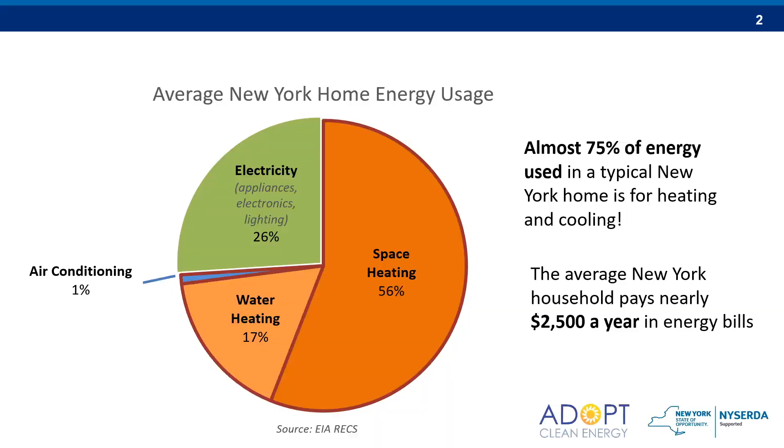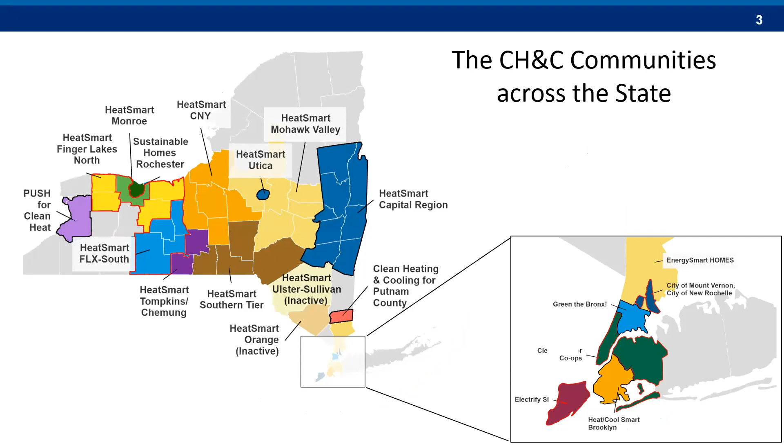So why adopt clean energy and why pursue heat pumps? Well, energy costs and energy burdens are a significant concern to New Yorkers, and heat pumps can in many cases provide energy savings, particularly when combined with other energy efficiency measures and switching to renewable forms of electricity. Improving home comfort is another concern that I think many have noticed, particularly over the last 18 months of being more or less trapped in our homes. Improving the distribution of heating in homes and also adding air conditioning has been a concern that many across the Northeast have faced.

Reducing the combustion of fossil fuels in homes can lead to healthier homes, with air pollutants related to combusting fossil fuels associated with increased risk of asthma and respiratory illnesses. Of course, the primary driver behind this, and why New York is investing so heavily in clean heating, cooling, electrification, and community initiatives, is to reduce greenhouse gas emissions in support of achieving the state's goals.

The goals of adopting clean energy are both to improve the efficiency of your home, reducing the amount of energy needed for heating and cooling, and to replace existing heating and cooling solutions with cheaper, cleaner, and more efficient solutions. Heat pumps are perhaps not the most well-known technology folks associate with reducing emissions, so this process can be a little complicated. That's exactly why Adopt Clean Energy is here, to make the process more straightforward and provide support to homeowners and businesses across the region as they embark on this journey.

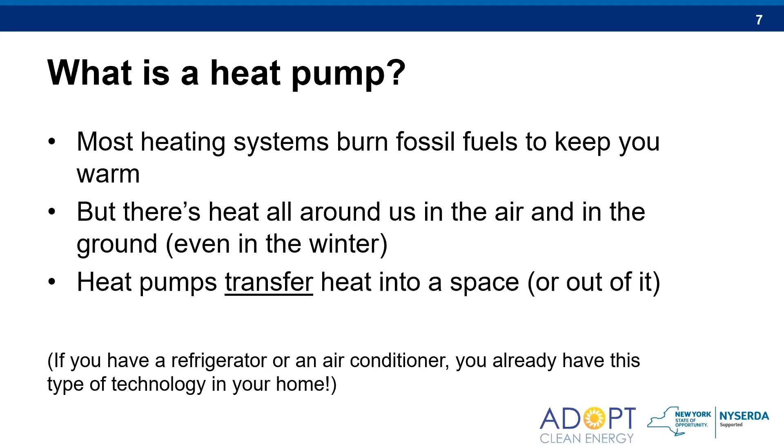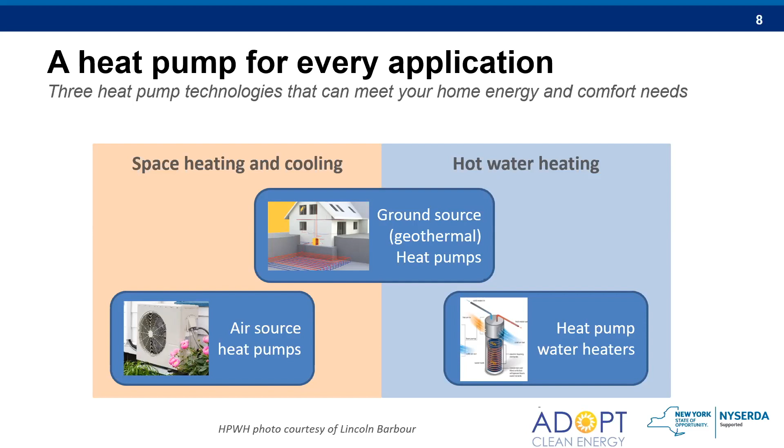There are heat pumps that can meet all of your space heating, cooling, and hot water needs, whether air source heat pumps, ground source or geothermal heat pumps, or heat pump water heaters for water heating. Air source heat pumps are best thought of as air conditioners that can also run in reverse to provide heating as well as cooling. They have an outdoor unit connected to one or more indoor units or to central ductwork in a home. Heat pumps have traditionally had a bit of a negative reputation in the Northeast because of poorer performance in cold climates, but new cold climate heat pumps have entered the market over the past decade that can provide heat down to -13 Fahrenheit or below. In many cases, they're installed alongside your existing heating system, but there are thousands of homes across the Northeast using heat pumps as their only source of heat, even in the cold winters here in New York.

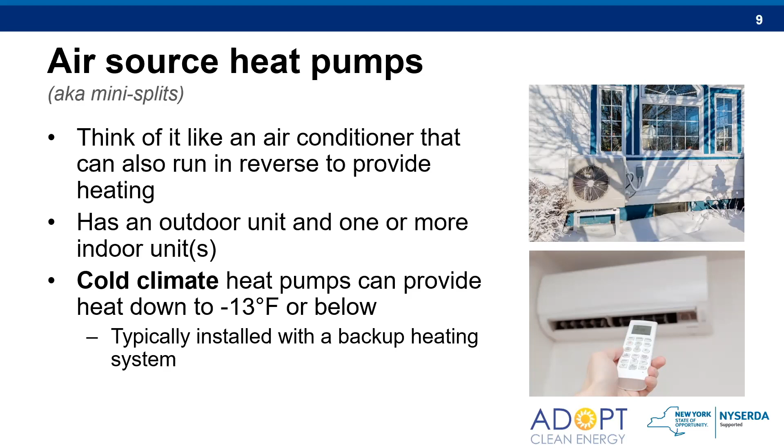Some benefits of air source heat pumps: a lot of homes across the Northeast are old and can't easily install ductwork, so many folks use ductless air source heat pumps to provide air conditioning as well as heating without installing ductwork - a great way to improve comfort and remove noisy window units. There are a lot of flexible applications for air source heat pumps. You don't necessarily need to replace your existing system - you can install ductless systems in a variety of ways, for example to just provide space heating and cooling to a living space, bedrooms, or new additions, depending on your needs. Ductless systems are inherently zoned systems, so you gain more control over comfort in different spaces in your home. They're also very quiet - the first time I heard a ductless heat pump operating, I could barely hear it until I put my head up next to the indoor unit.

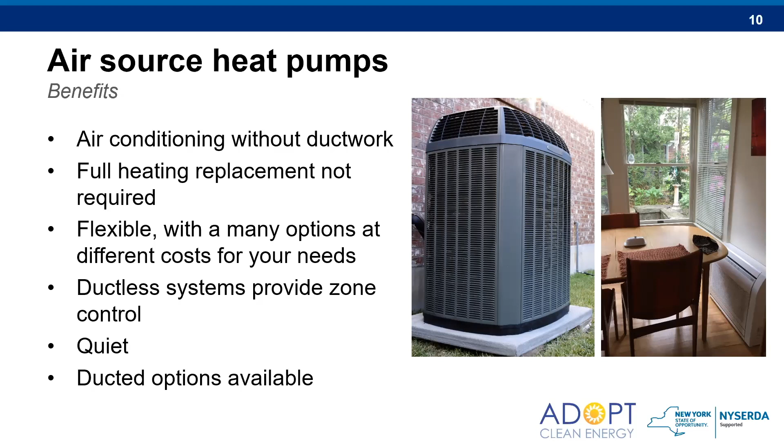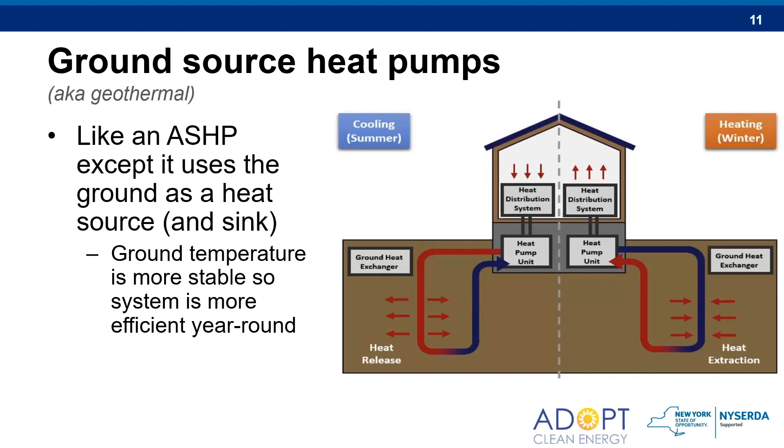Vertical applications will involve drilling a few hundred feet underground, whereas horizontal applications will use some excavation of a yard to be able to lay the piping to transfer heat. If you also happen to have a source of groundwater on your property, they can also be installed as open loop systems using the groundwater to extract or reject heat.

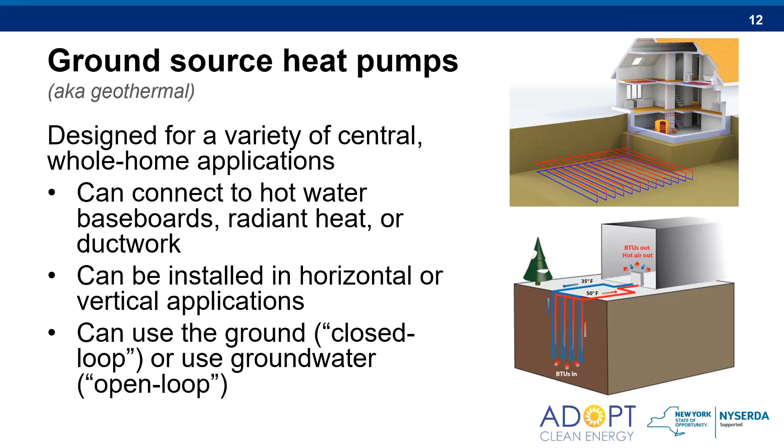Ground source heat pumps are the most efficient heating and cooling system available. While air source heat pumps are usually around 250% efficient—that is, for every 1 unit of electricity used, you get 2.5 or more units of heat—ground source heat pumps can exceed 350% efficiency, whereas the most efficient fossil fuel or electric resistance heating system will never exceed 100%. Again, because of the more stable temperature, ground source heat pumps have less of a drop off in efficiency.

Ground source heat pumps also have a very long system lifetime. The ground piping that's installed in your yard is expected to last for at least 50, if not 100 years, whereas the indoor components for 25 years or more.

Ground source heat pumps, as a standalone and sole source of heating or cooling, can fully eliminate fossil fuels from your homes and can also provide domestic hot water if desired.

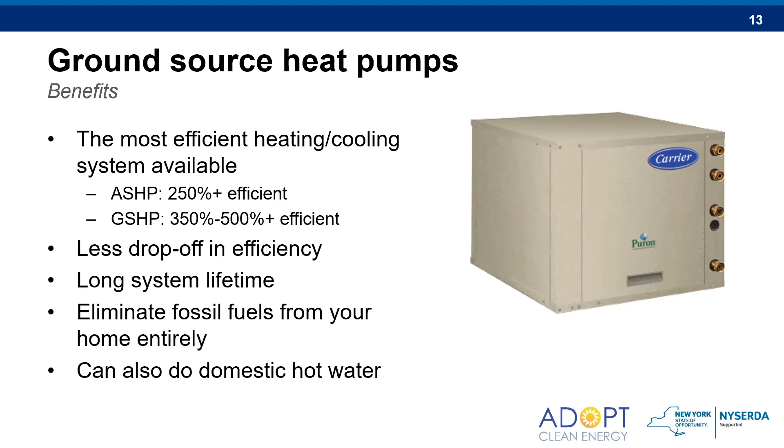The last form of heat pumps we'll talk about are heat pump water heaters, which really just look like a hot water tank with heat pump elements on top of it, and it uses the indoor air around the heat pump water heater to heat your hot water. There are also backup electric elements in there for meeting periods of higher hot water demand, so that your hot water can be delivered consistently to meet your needs.

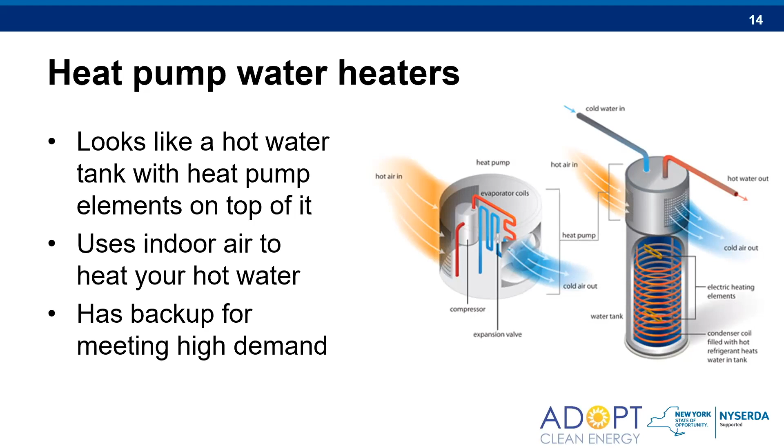Similar to the other heat pump technologies, they are 200% or more efficient than typical electric water heaters, and significantly more efficient than fossil fuel water heaters. They're also very commonly installed in unfinished basements in the Northeast, and so when they are operating, they will also naturally dehumidify the space. So they can be a pretty affordable heat pump solution for saving money.

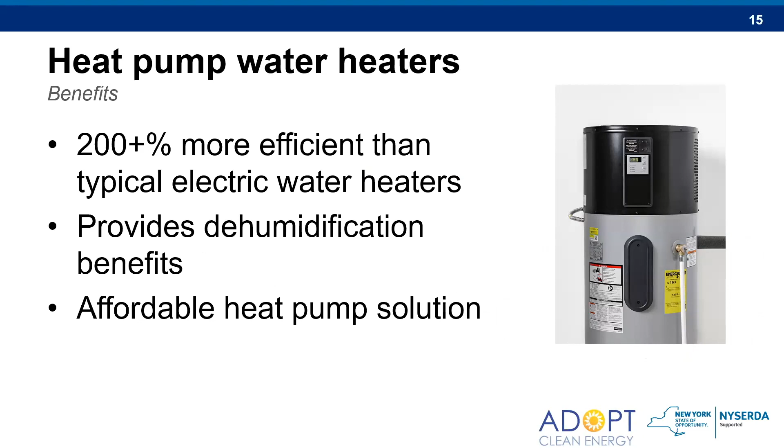The cost of these technologies vary significantly from home to home. No two projects are the same, even if you install the exact same equipment. There may be some different needs between homes or preferences for the homeowner.

But here are some of the potential costs that you can see for the technologies here: air source heat pumps, depending on the solution you're looking for, starting at around $4,000; ground source heat pumps at around $35,000; and heat pump water heaters at around $3,000.

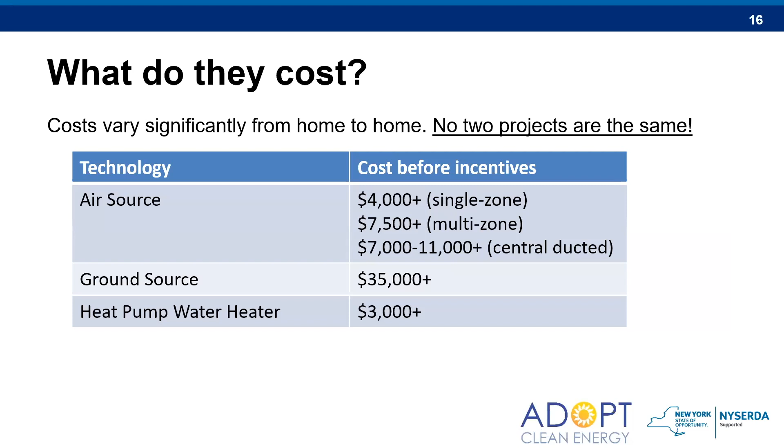How much exactly will you save? Well, it depends very much on what will be the costs of fuels over the course of the 20+ year lifetime that you have these systems in place. Folks that are using oil or propane and electric heating now will see the most heating fuel savings. Folks on gas will not really see as many savings, unless you are using solar PV as your form of providing electricity to your system.

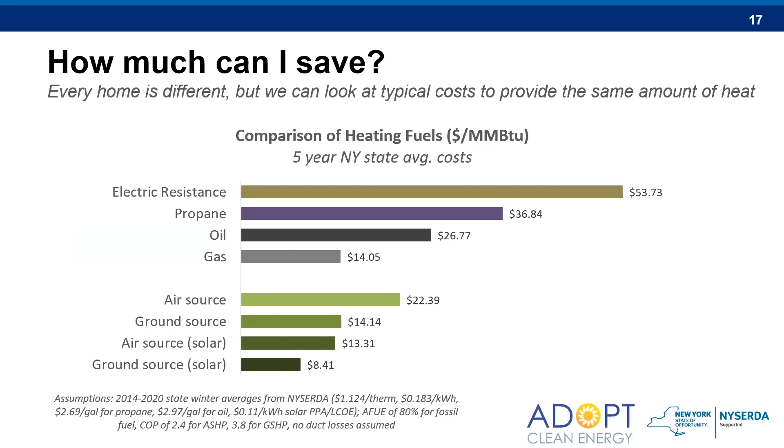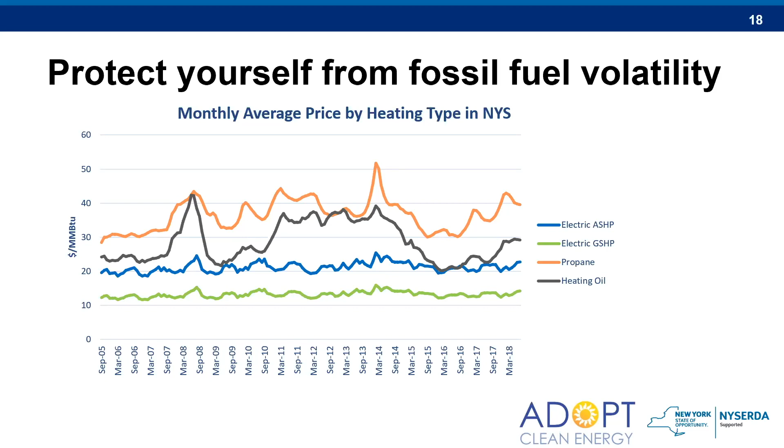But of course, there are also some benefits to switching to electricity. Electricity prices tend to be much more stable as a regulated fuel, whereas, as I'm sure anyone who's heated with oil knows, prices spike from season to season. Similarly, gas futures are at a substantial high right now for the coming heating season. So some of that pricing volatility can be addressed by switching to heat pumps, particularly if you use a solar PV system to generate the electricity for your heat pump.

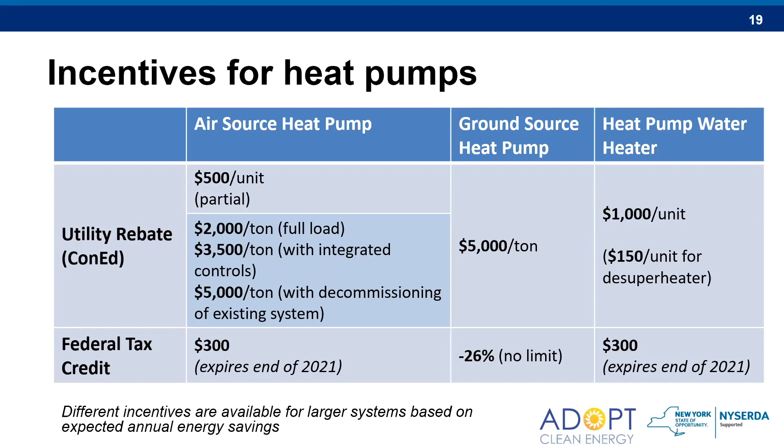Of course, there are also a lot of incentives available, particularly in this area for customers of Con Edison—thousands and thousands of dollars per system. For some of these system applications, you could be looking at over half of the cost being covered by incentives from Con Ed and from the federal government. So definitely, if you're interested in a heat pump solution, speak more with your installer and visit the Adopt Clean Energy website to learn more about these substantial—over I believe a $700 million investment—that is being made in heat pumps over the next few years.

There are also a variety of financing options that are available, both through NYSERDA programs and also through the contractors that are serving Adopt Clean Energy, and a variety of special groups and local banks and credit unions.

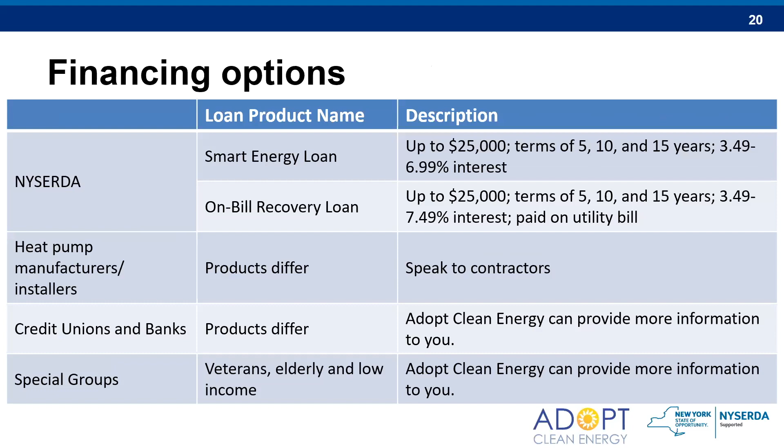So the best place to get started here is to visit the Adopt Clean Energy website. And with that, I will turn it over to the next speaker.

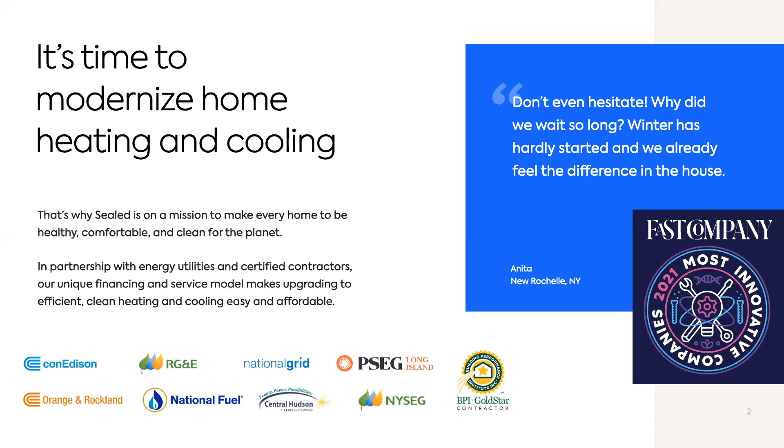A little bit about Sealed: as I mentioned, we're literally invested in clean heat, and that's not only figuratively true, that's literally true. We're on a mission to make every home healthy, comfortable, and clean for the planet. We know that starts with heat pumps, it starts with weatherization, it starts with smart home technology. We work with many local New York utilities, but also very importantly, local certified contractors, with our financing and service model to make upgrading homes easy and affordable. We do that by focusing not on energy, and not even on the environment all the time, but really on the problems that we all feel every day. What we found is the best way to increase the adoption of clean energy and clean solutions is to really focus on comfort, health, safety—all the issues we feel in our homes every day. So drafty rooms, icy floors, uneven temperatures, hot and cold spots, out-of-date heating and cooling systems that may be too loud or cause other problems, and of course, poor air quality. There's more and more data showing that fossil fuel systems in our home, what we like to call dead dinosaur systems, aren't always the healthiest for our indoor air quality. So we really want to help our customers be healthier in their home, more comfortable and safe.

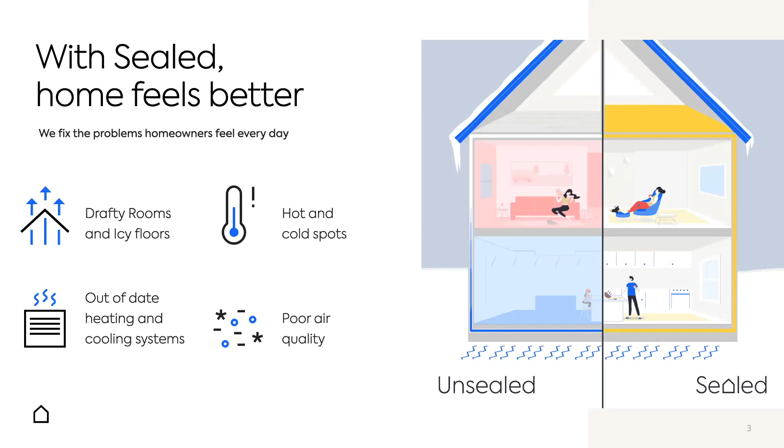You can see a little GIF that we have here to show that. So what we do is we modernize homes through deep retrofits, through insulation, weatherization, heat pumps, HVAC solutions, and smart home tech.

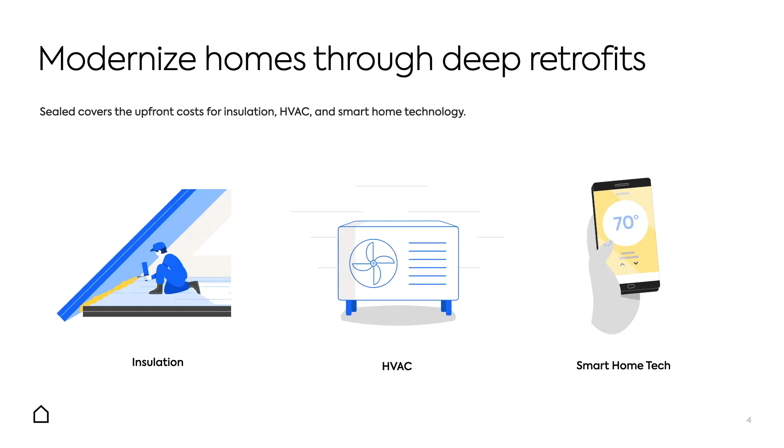We not only put up the capital to install these projects, but we also only get paid back based on the actual energy reduction. So we're putting our money where our mouth is when it comes to the performance of these projects. And then we help manage the process from beginning to end.

One thing we found really important is explaining what heat pumps are and what they do in accessible, easy language, which is key to expanding mass adoption of heat pumps. So if you'll indulge me, let's play a quick video.

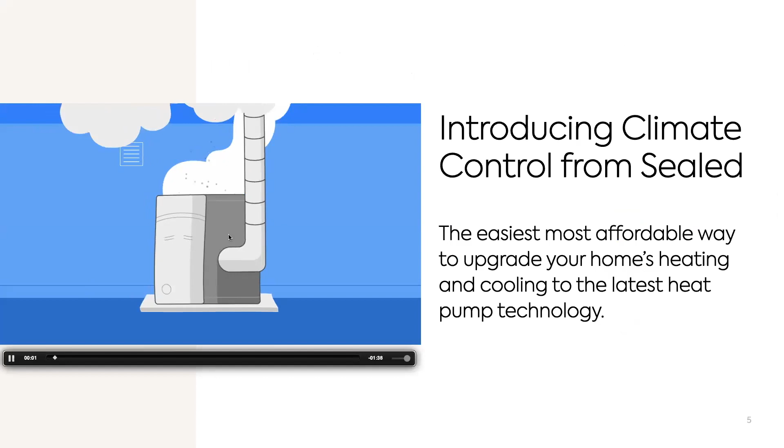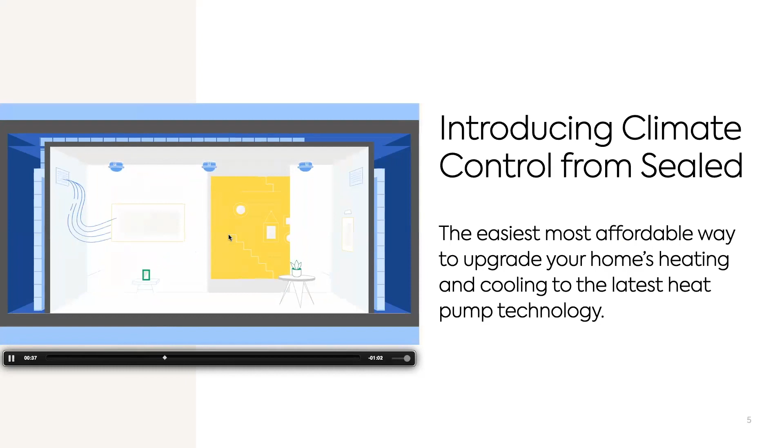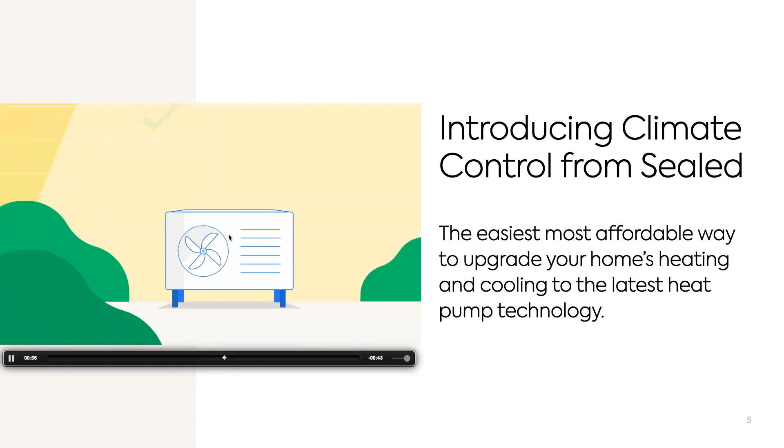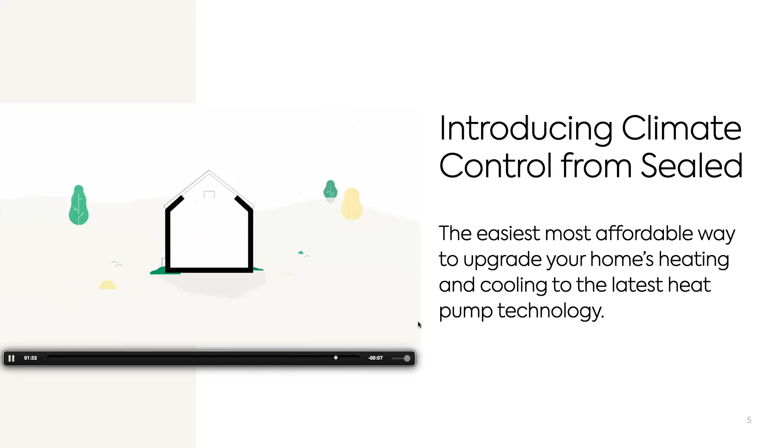Hey, look, it's your heater and air conditioner. This power couple has been with you through a lot, but lately they're a little tired and noisier. They've made friends with the repairman time and time again. You know it's time to make a change, but researching equipment and contractors can be a hassle, never mind the cost. So why not try climate control from Sealed? It's a comprehensive plan that improves your heating and cooling without breaking the bank. You'll get a new heat pump system that heats and cools your house, all in one unit. Heat pumps give you consistent, clean airflow with room-by-room temperature control. They can even plug right into your existing infrastructure. Heat pumps are whisper quiet and can use as little power as a toaster or two. That's up to 3 times more efficient than traditional HVAC systems, which means they're great for you and the planet. Sealed even covers the upfront costs. You only pay us back if you save energy. Plus, Sealed coordinates all the work for you—contractors, equipment, everything. So you get a brand new system with none of the old headaches. Still not sure? Just ask the Queen. Heat pumps are even being used in Buckingham Palace. So you can rest easy knowing they'll work for your palace too. It's time to say so long to these two, and hello to climate control from Sealed, the smarter way to heat and cool your home. Sealed. Make yourself at home.

I showed that shameless plug to demonstrate what I think is really important about what we all need to do as part of this industry, which is to make heat pumps sexy and cool. I'm going to steal something my friend Donnel from BlocPower talks about a lot, which is basically putting a Tesla in everyone's basement. The Tesla of HVAC is really what we need to drive, and the sex appeal we're trying to get for people, because it's not just about the dollars and cents. It's really about how people feel and what they're excited to buy, which is what we're focused on.

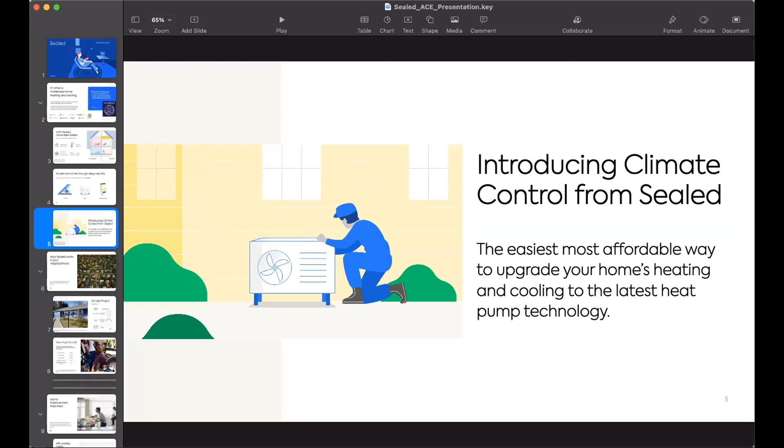So what does that look like? We've been working in New Rochelle and Mount Vernon for a long time, largely on weatherization. Our heat pump product is a little bit newer. But to give you a sense of what that looks like, these are big projects. For example, one customer in New Rochelle is doing comprehensive air sealing, attic, wall and foundation insulation, as well as putting in a new heat pump.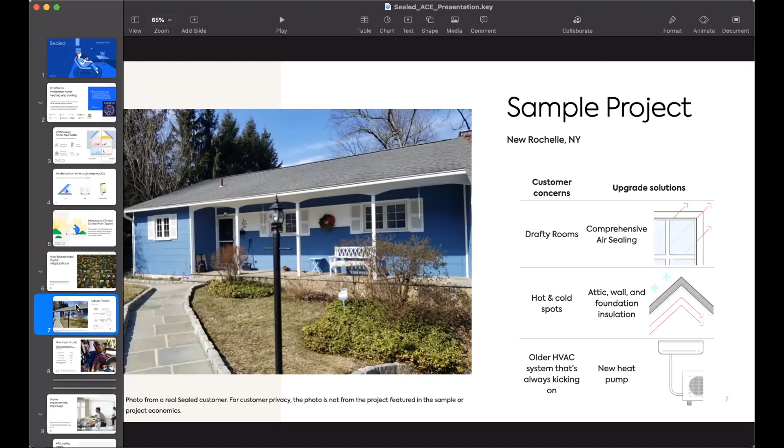We do both ductless and ducted systems. We found ductless units in particular are a really great solution for many different home types in this area. And the truth is it costs a lot of money—these are big improvements, but you're getting 2 in 1: an improved heating system as well as a cooling system.

The great news is there are great state and utility rebates that can help offset the cost. So we're doing projects that are saving upwards of 40, 50, sometimes 60% on total energy reductions, and Sealed is able to cover those upfront costs. Customers are able to pay us back based on the actual energy reduced. We're excited to be a partner, to help many more homeowners make the conversion to clean heat and heat pumps, and excited to partner with all of you to make that happen.

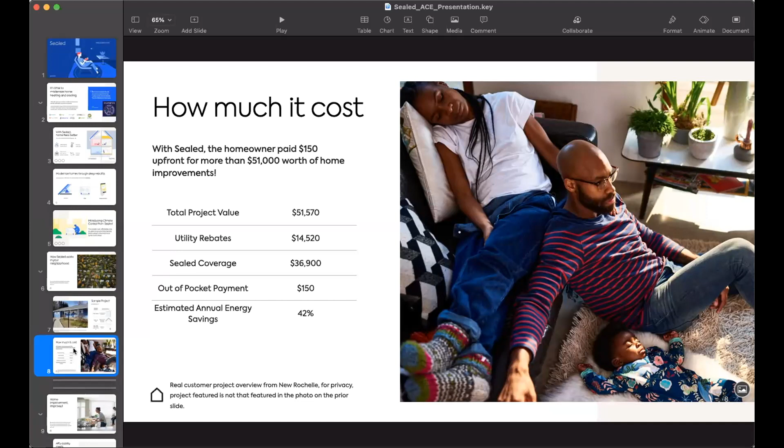Thank you very much, Marilyn. Let me get out of the other Zoom. One of the dangers is you do 2 Zooms at once in politics. So I will get out of the other one, but thank you. It's a pleasure to be here.

Thank you to my friend Marvin Church and Diana Williams. I am honored to represent a portion of New Rochelle. I share it with the Majority Leader, Andrea Stewart-Cousins. Because of gerrymandering, I have the north side and the south side, and she has the central side, so to speak.

After Ida, I went door to door to a number of houses in my district in New Rochelle that were absolutely devastated. And it was clear that whether it's institutional change in the way our cities work, investment at the state level in major infrastructure and flood mitigation, or helping individuals in their homes.

Recognize the impact of climate change and prepare. We have all of these challenges we absolutely must face, and it's incredibly important that we do it in communities like New Rochelle, where we have a significant number of folks who are struggling with their home ownership. They have many challenges along the way. To have such an affordable product as Omar Hernandez described through NYSERDA and through the other partners here, this is a game changer for New Rochelle, and I couldn't be more pleased.

The site where the dot is right now, that's the first phase. The second phase is the one that looks under construction to the left. And in New York City and Westchester as well, you have MTA infrastructure, and there are certain permitting requirements required around that. This was the first project that New York City approved and New York State MTA approved in this proximity to the railroad structure.

So we were able to create new grounds and be able to increase the availability of geothermal. This particular project, we have 36 boreholes. We drilled them each to 450 feet deep. We have a number of circuits going into the building. It's currently installed under the parking lot and the playground, so the space where it is can be used for additional items.

I'm going to show at the end two upcoming projects, both of those where the loop fields are under the building. So for new construction, when people tell me that they don't have room to drill, we'll find the room to drill. We've yet to find a project that we couldn't fit geothermal, ranging from 400,000 square foot office buildings to 1,200 square foot houses.

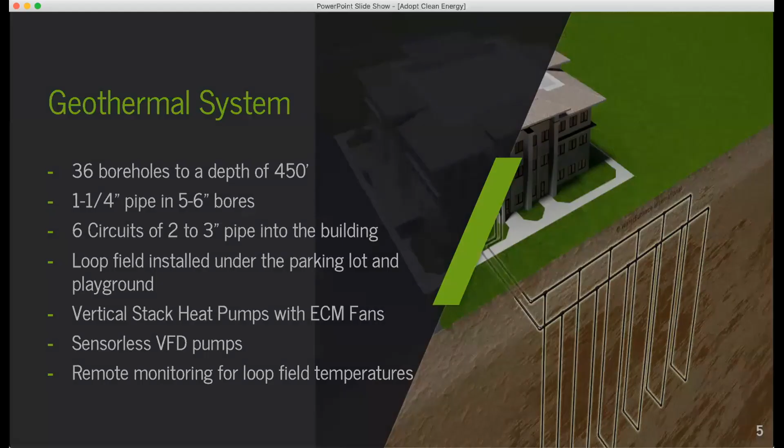As I mentioned before, this was really a first project. It was the first project in New York City with a closed loop system for affordable housing, and the first geothermal system in a passive house building. At the time of installation, it was the largest one in the United States. It was also the first project to get MTA approval, and we've since gotten it on 3 or 4 additional projects. On Long Island, we were able to get PSEG, who doesn't have as great incentives as Con Ed, to develop a rebate program.

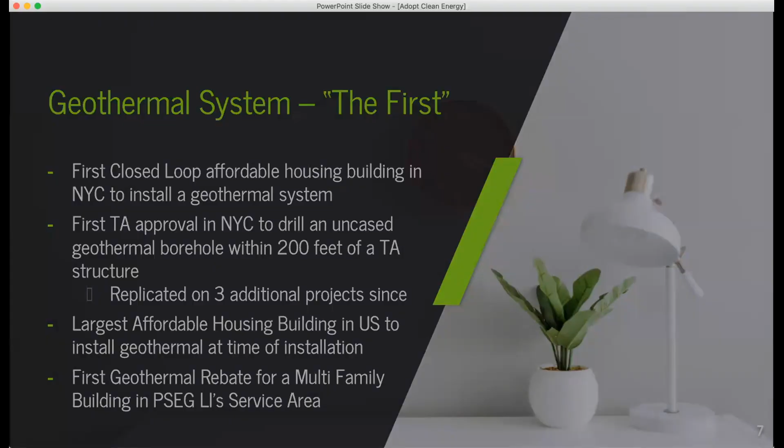Because we drilled so close to the transit structure, we were required to make sure we didn't disturb it or move it at all. The structure is still standing, it's been there for 100 years, and we anticipate it to be there for hundreds more.

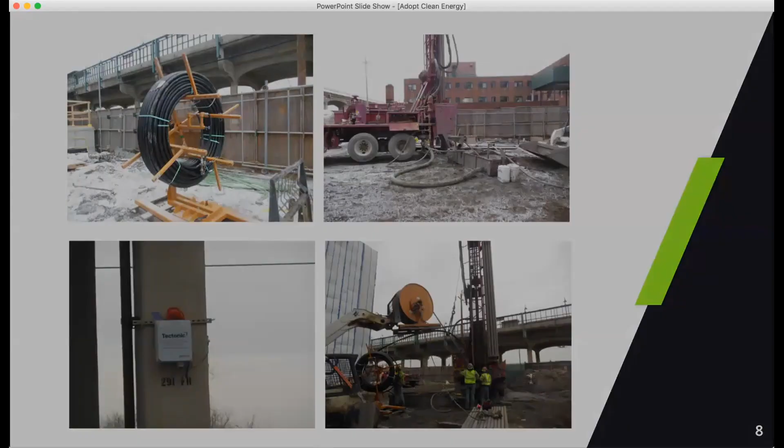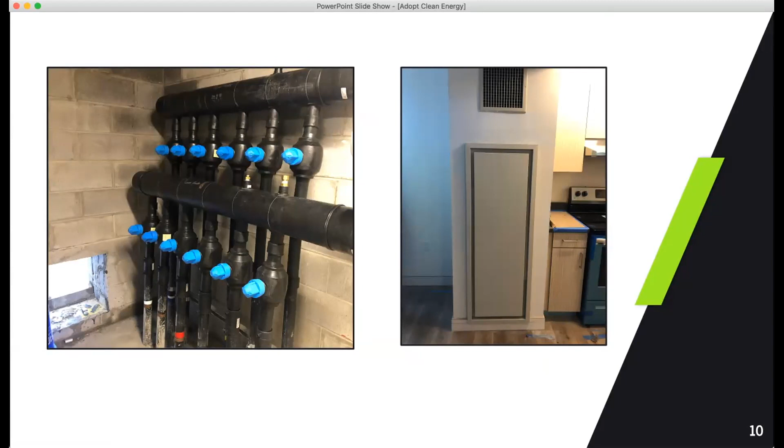So just to reiterate, $10 a month for heating and cooling. I personally think that's the coolest part of this project.

Just talking about 2 upcoming projects, we have the largest geothermal system in New York City coming up. It's a 26 and a 16-story tower, 153 boreholes under the building, about 450,000 square feet.

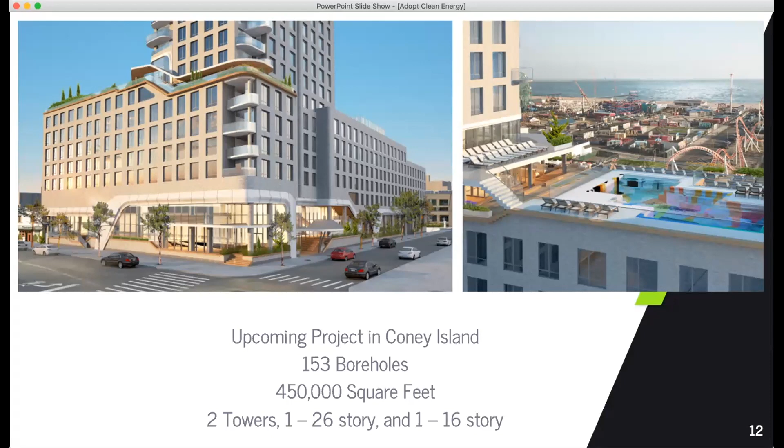And then in Westchester, we're starting a project in Tarrytown, which is senior affordable housing. The loop field is partially under the building, partially in available space. It was an old YMCA that the developer is redeveloping, and geothermal makes a lot of sense. This project's going to get about a $900,000 rebate from Con Edison, which more than covers the added cost of geothermal for this project.